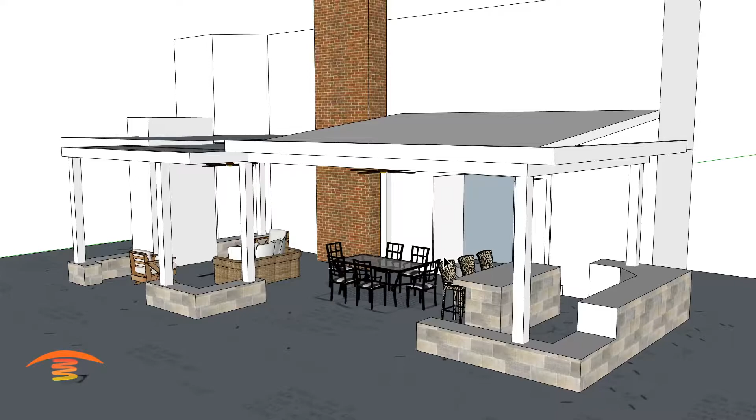Today we're going to take a look at this residential application. So we have, actually there's three different areas here. We have this bar stool seating height over here, dining over here, and then just a reclining area over here. Let's go ahead and look at the dimensions.

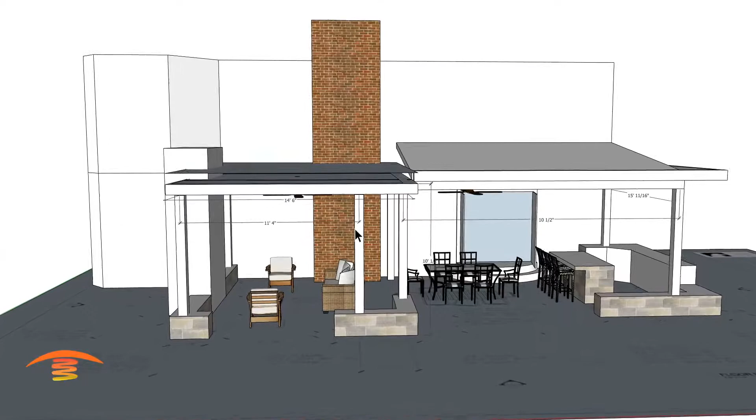So from center post to center post is what I'm using here. I got 11.4 from here to here. From here to this post over here is 14.6. And then from this post here to this post here is 19.10. And then I have a height here of approximately 10 foot, it's 10 and a half.

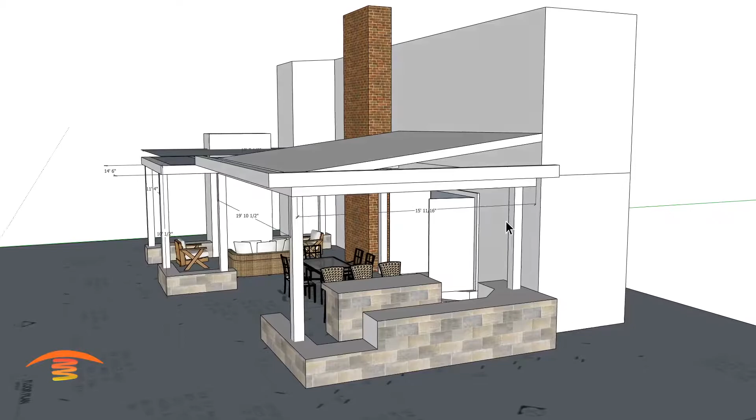This distance over here, 15 feet from the center post to the wall. Not sure if I have one here. Yes, we do. Here we go. We got 19 feet 7 inches from the outside edge to the wall here.

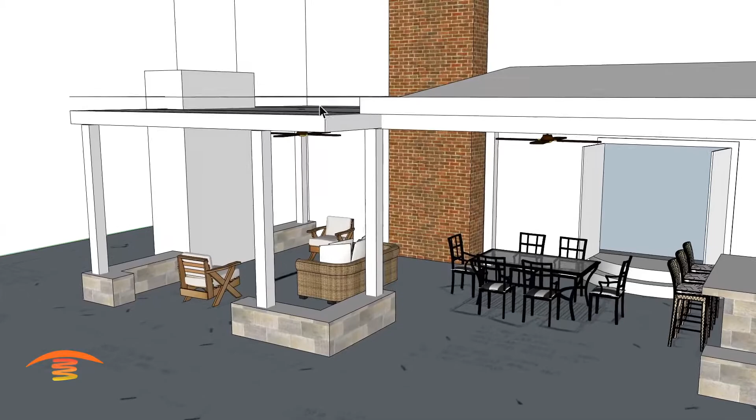So you can see I don't have this completed up here, and that's because I'm not really sure what the construction is going to be up here, but what I do understand is that it's going to be a T&G ceiling here, and a T&G ceiling here. This one here I believe is at a slope, and then the one over here is a flat ceiling.

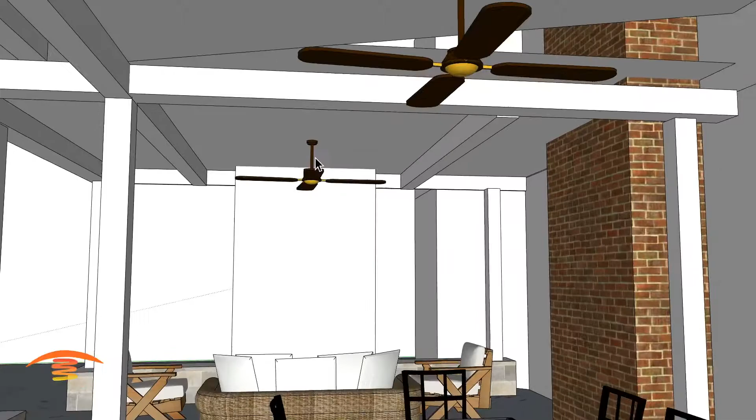A couple of things we want to look at is these fans, the placement of the fans. Also, we have these beams coming across, and I'm not sure whether the doors open inwards or outwards, so I have them out right now. Something to think about.

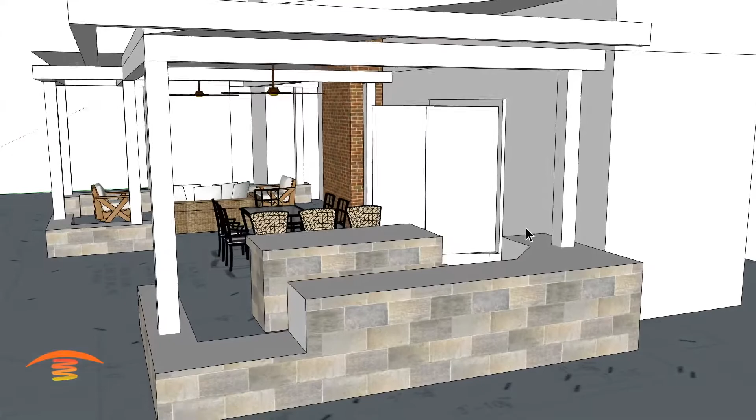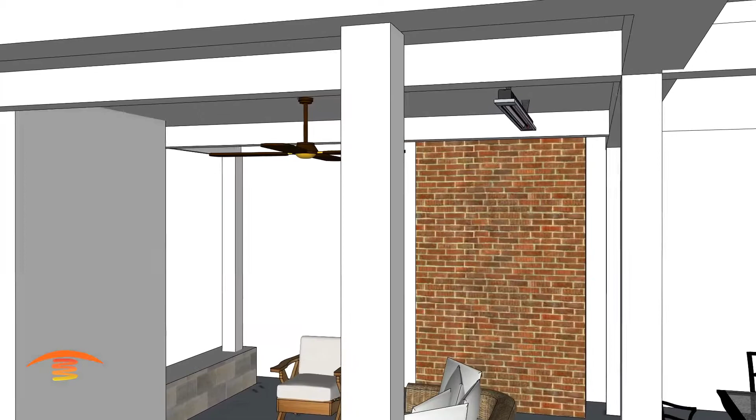So we're going to look at this area here first, and I have two different options for this area here. The one option would be to place one heater so that we can raise it as high as possible, mount it on the ceiling, and then it only requires 6 inches of clearance. Let me see if I can put that up here. Top clearance is here. So 6 inches of clearance around the top edge of the heater. And obviously we meet that.

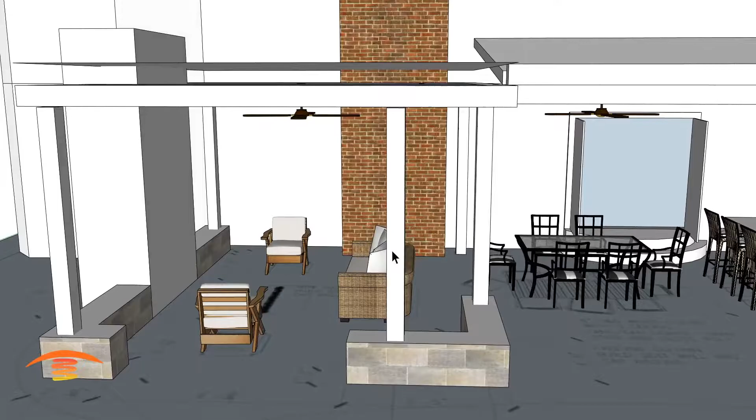We could push it a little bit further towards this beam to kind of reduce it sticking out in the middle of a room. However, I am trying to heat up this area here, and in order to do so I have to move that as close as I possibly can, and I might even want to move it even closer to this fan here. So there is a bottom clearance here. This bottom clearance is 18 inches from the bottom of the heater edge here.

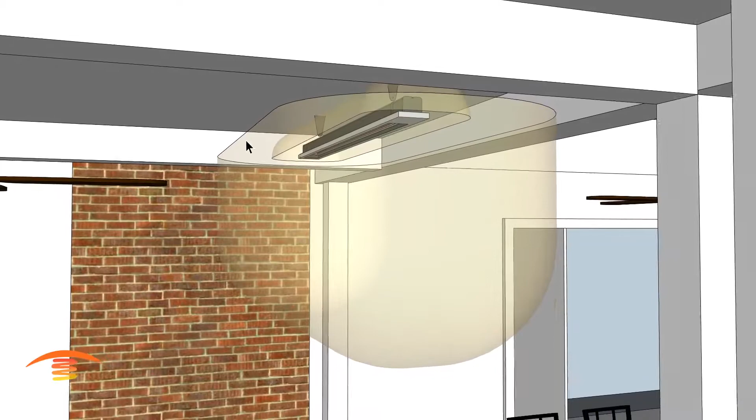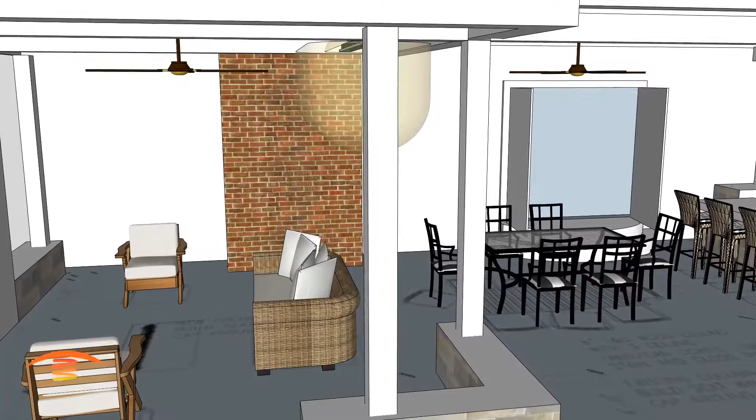Let's see if we can go in here. So this bottom edge here all the way out 18 inches all the way around the heater, and then it is 36 inches down. Clearance to any combustible material, and of course that's 6 inches on top. So yeah, we could move it closer to the fan blade and get a better coverage as far as the seating over here, but let's go ahead and look at the coverage that we have.

You can see pointed straight down, we're not really hitting these chairs whatsoever. There is a table here in the center, but that might be a good option for this application here.

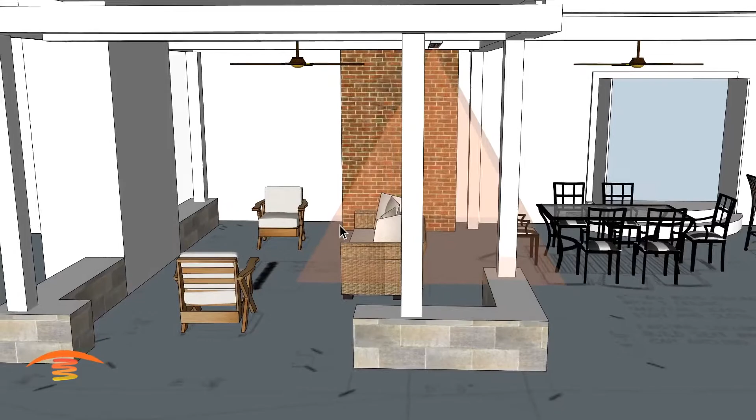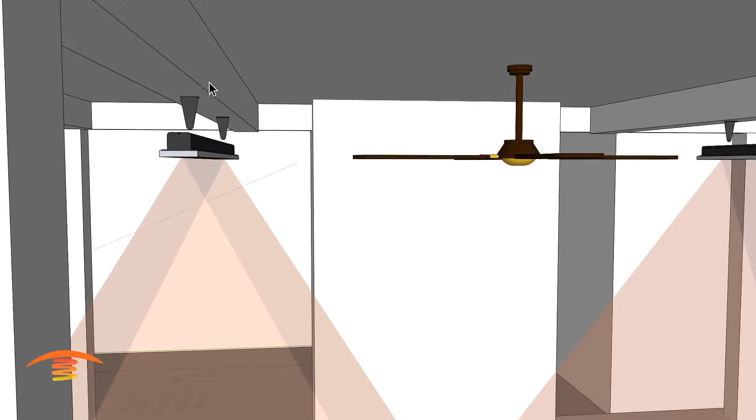Now a second option would be to utilize 2 units and place them on the bottom of the beams. Now we cannot place them up here on the ceiling and then meet the clearances to the fan blade and to the beam itself. So that's why I have them located this way, but you can see the coverage this way is a little bit better.

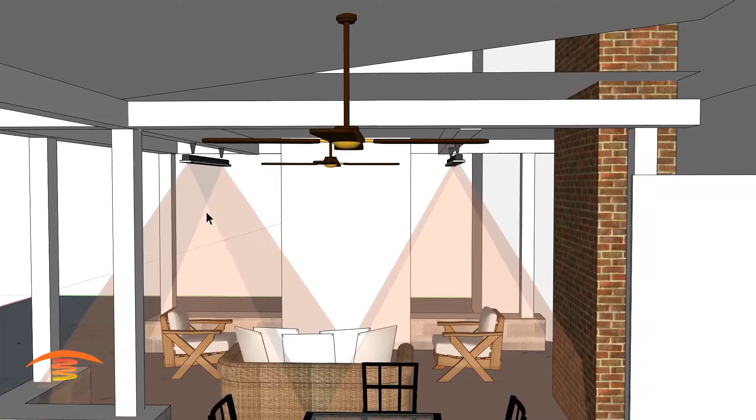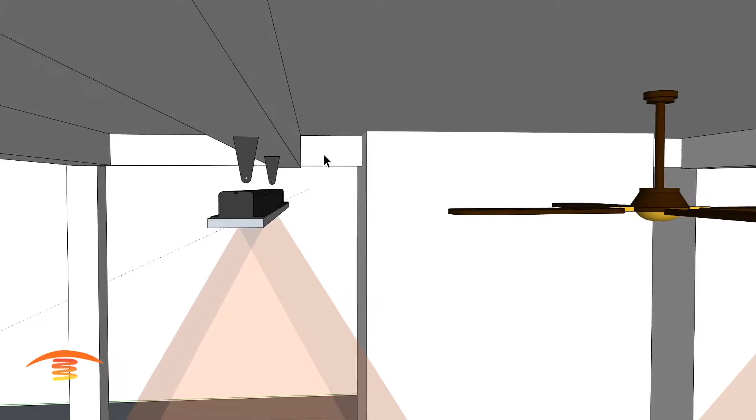You could slightly angle the heater towards the center, so you can maybe put a 5-degree tilt this way and this way. And by the way, these are 4,000 watt Slimline units. I picked the Slimline unit just because of the fact that it's got this low profile. It's kind of square looking, so it kind of matches this beam profile. You could use the W series or C series 4,000 watt unit, and you get the same result as far as its footprint.

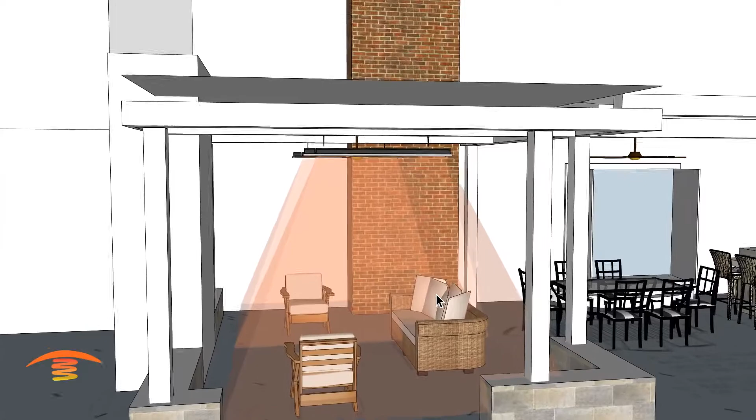So that would be this area over here, and you wouldn't have to do anything to modify the brackets on either that first option or this option here. So let's go ahead and turn that off.

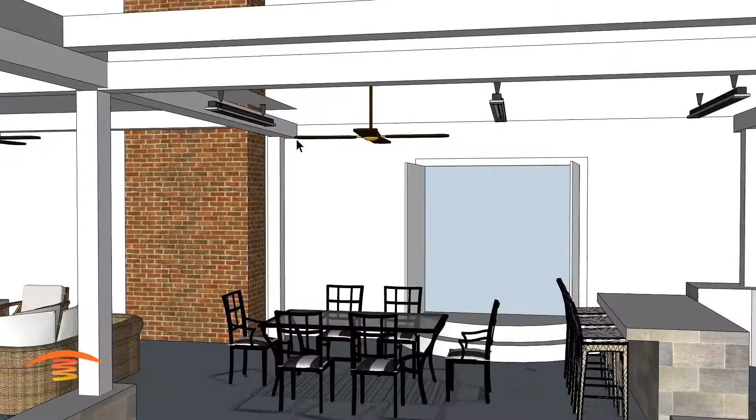And then the last option would be to place units, and the trick is going to be how to actually mount the units up here. So if I mount it on the wall over here, or even above on the ceiling over here, and angle it out, if these doors come out, then that's an issue.

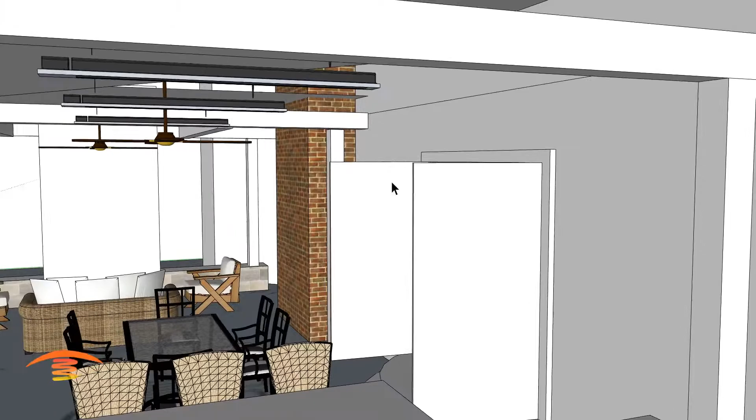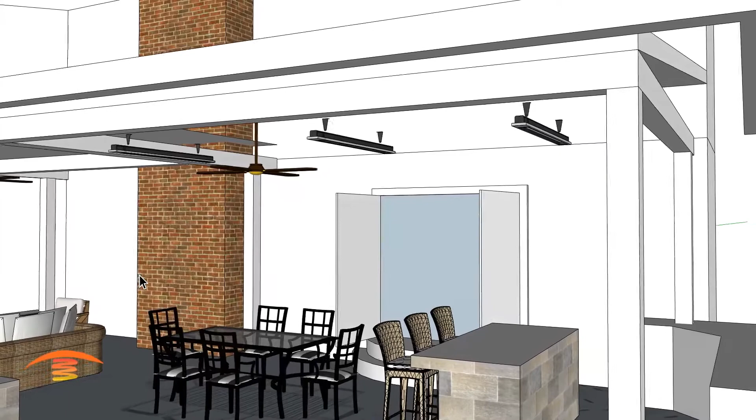We can't have the heater above the doorway opening up and then causing a fire hazard that way. You know, we can place the heaters along this edge and aim them inwards. We could place a unit over here and a unit on this side here, place those inwards to meet this area. But we'd probably have to use an extra 4th unit in order to do that, and we wouldn't be able to mount over here unless the doors open up. Excuse me, open inside.

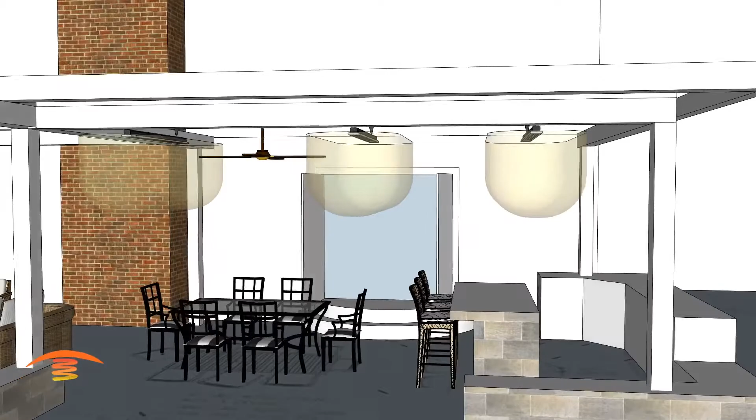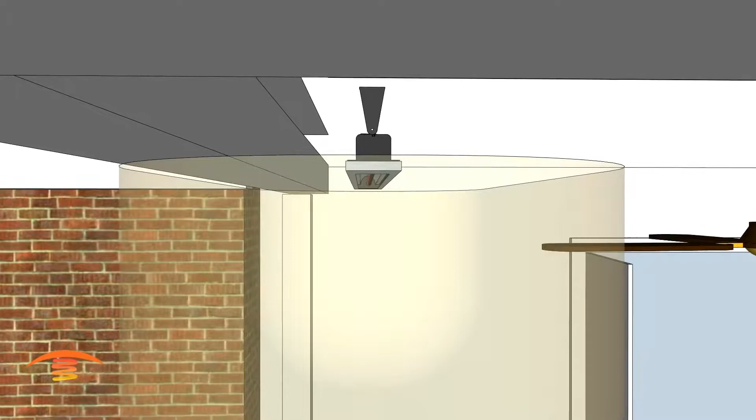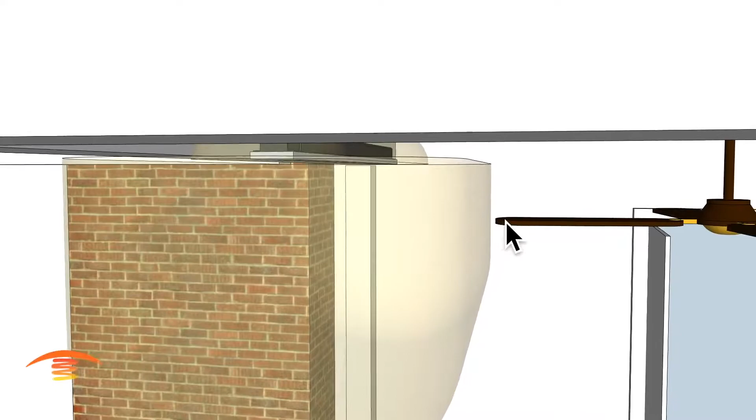So I want to go ahead and show you the clearances. I want to talk about this bottom clearance again. So what I've done here is I've met the bottom edge of the heater to the bottom edge of this beam, so that way I'm not in that 18-inch clearance area. The top clearance here, you can see I've got all the way to the edge as close as I can. I got an inch here maybe, but this way I'm not hitting that fan blade over here, and I'm still pushing the unit out towards this direction on the right.

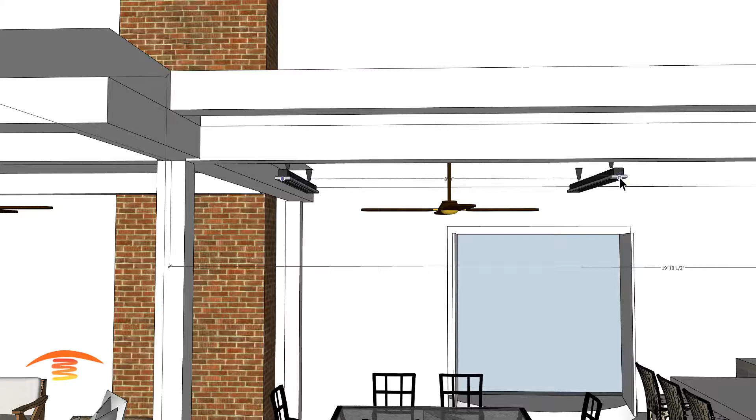I believe the dimensions, let me go back to that real quick. I don't have this marked here, so hold on one second. And dimensions between the 2 center heaters is 8 feet 8 inches. I generally like to keep these between 8 feet and 9 feet center. So this works out pretty well. Let's just go ahead and look at this over here. That to here. So that's 6 feet 6 inches over here.

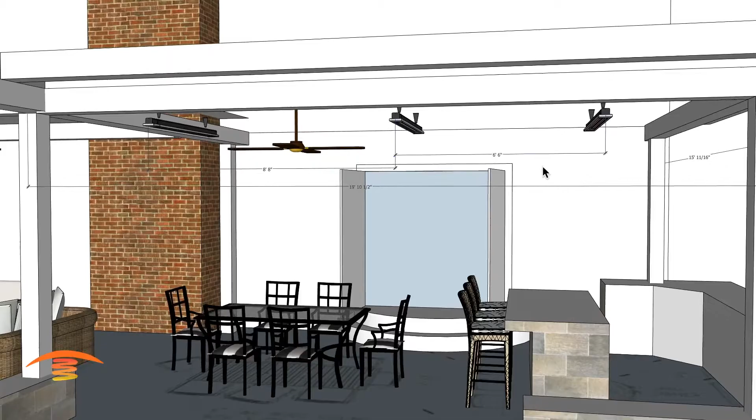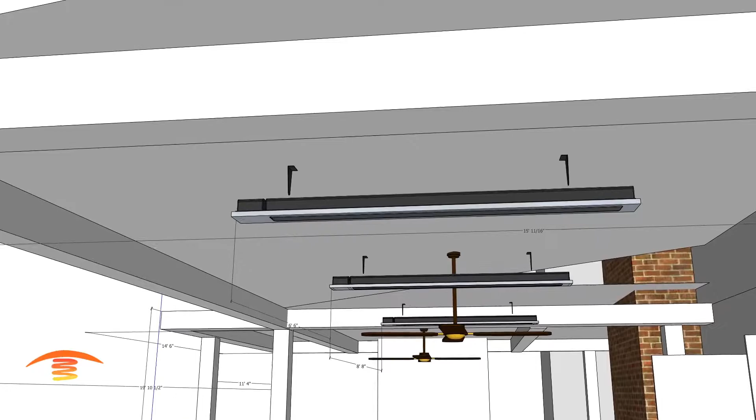So again, the dilemma is going to be how to hang these units. I would recommend using something like a chain, or you can modify or design your own bracket that would mount on the ceiling. Let me turn the dimensions off here. So if you were to take a chain and just mount it straight to the ceiling, and then keep the heater level, and then mount a bracket over here.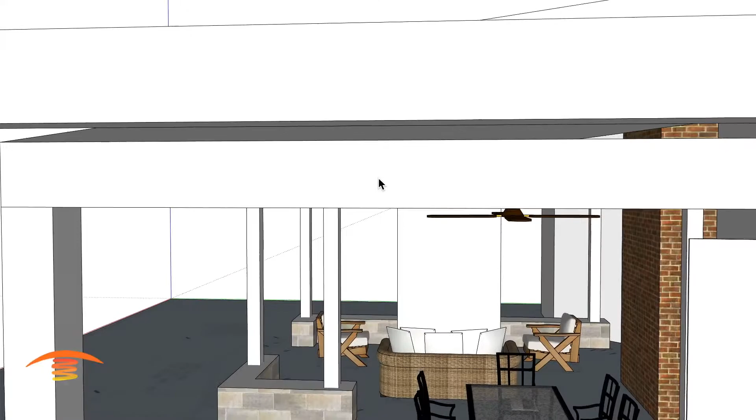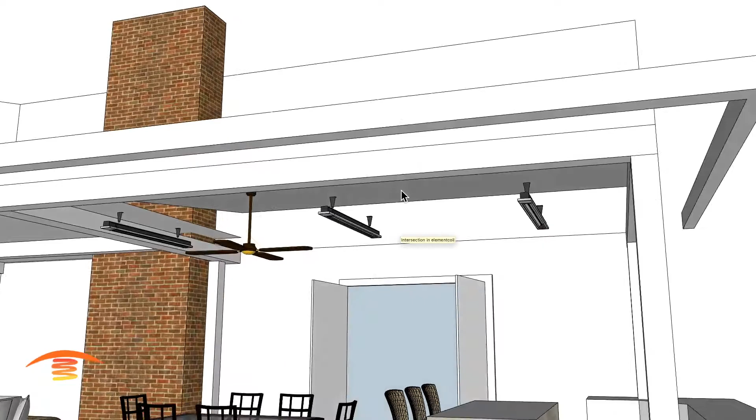I do have this lower than the ceiling, and that's only because of the fact that, see if I can show that here, I want to keep all the heaters at the same level, and also below that back beam over here, so that we can meet that clearance back there. So you'll have to get a little creative with the bracket on how to mount that, but I think that would work out pretty well.

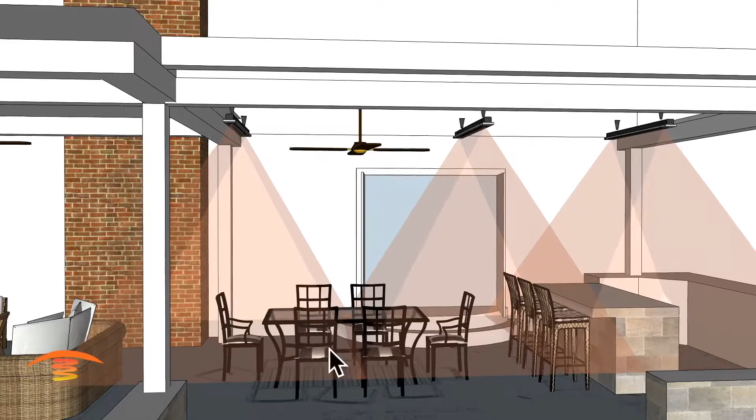And let's go ahead and look at the footprint of heat. So you can see here with this unit here, we're getting a nice partial coverage of the table. It actually throws it out a little bit this way as well. And then from this vantage point, you can see that we have a nice coverage from left to right here.

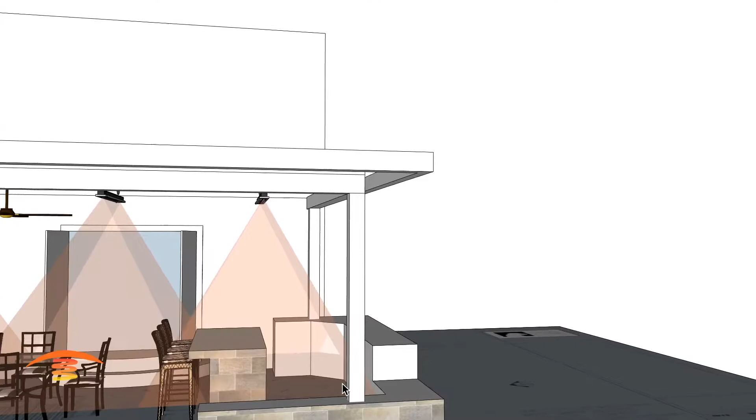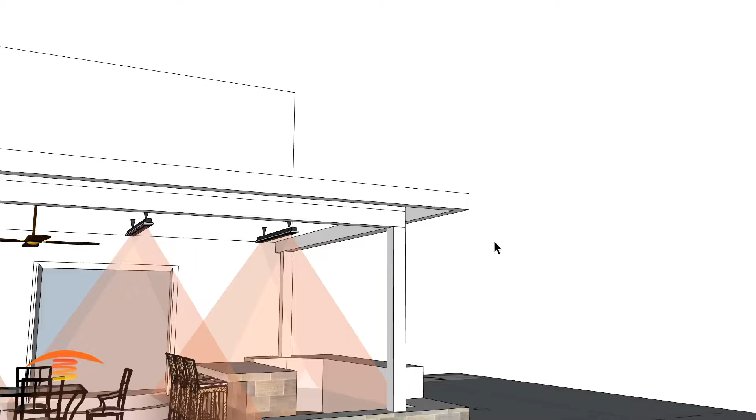Now this is a kitchen area, and I would imagine that you'll be standing most of the time back here. You might put a stool back here while you're monitoring your meals or whatnot, but this heater is a 4,000 watt unit. You'd probably want to consider a control system, so you can dim this unit down, as well as here, because of the bar stool seating height here. And if you were to do that, then you might as well do these over here.

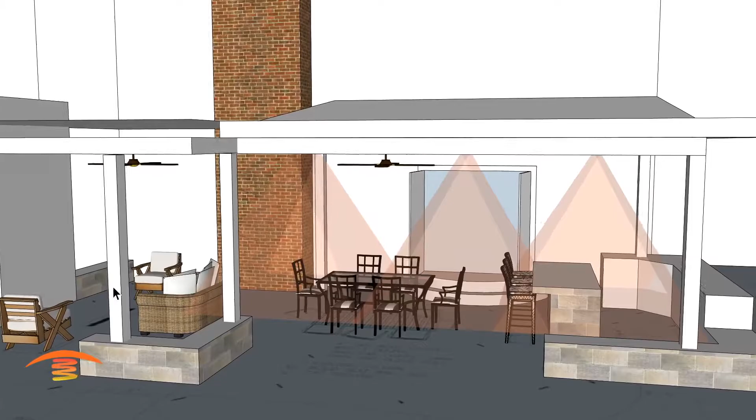The 4,000 watts over here, I think you'd keep them on 100% most of the time. So I wouldn't be too concerned about that, but these here, you want to consider that, at least for sure, the right two over here. So that would be my recommendation for this layout.

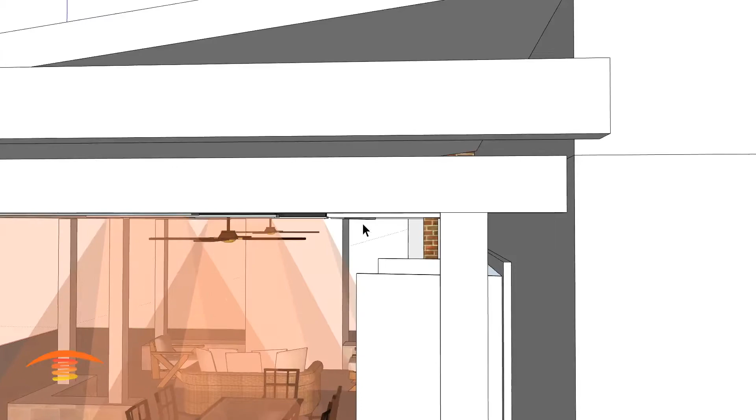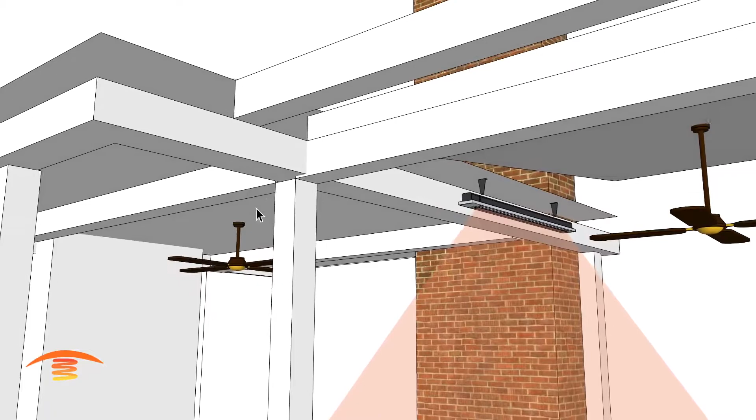I know the ceiling could also be a flat ceiling. If that's true, then this still works out. And also, if you were considering placing this insert or flush mount inside the ceiling, because it's a T&G ceiling, the limitations are that fan again, and these beams here, and you can't really put one between here to get the area out here that you're looking for properly. All right, I hope this has helped.